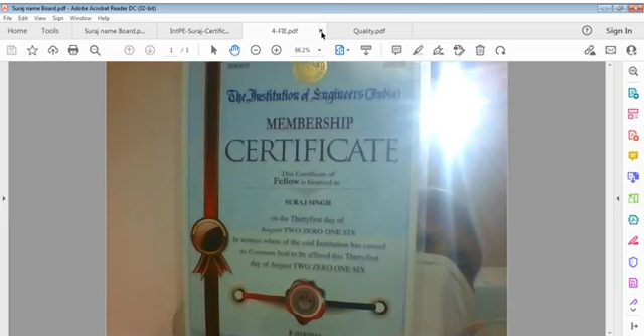And this is your quality file as usual. So I'll take care of this and close this certificate of Chartered Engineer India, and close the certificate of fellow membership, and open another file, and that is the concrete file, which is concrete from Qatar. That file is here, you can see that file. It's an important file of specifications, and you know the meaning of specification in engineering and in works.

Specifications is chapter 5, or you can say section 5, of QCS 2014, and QCS stands for Qatar Construction Specifications. This is a very important chapter, very important file, very important section, because concrete is very important all over the world.

And this is my identification indicatively. This is name and title, first title, then second title - that is Chartered Engineer as first one, and International Professional Engineer second one, Antarashtriya Professional Abhiyanta and Chartered Abhiyanta, Bharat. Of course my professional field is civil engineering, and my email ID is suraj_engineer@yahoo.co.uk. You can note it down if you wish.

And of course I belong to Bharat, India, citizen of Bharat, India, and I am resident in NCR, Delhi, that is Faridabad, near Delhi. And of course you can write to me if you wish on this email ID. If I find your question is relevant to my profession, or I am able to respond to that, I shall be glad to respond, provided the question is right, the question is clear.

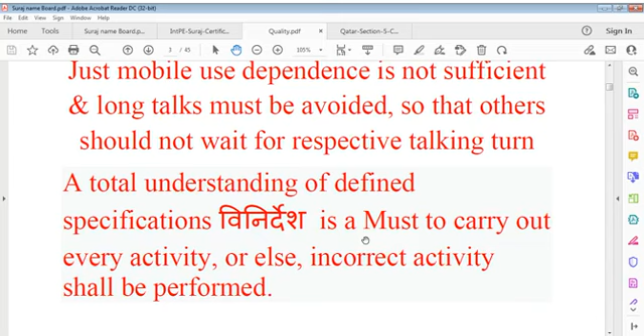Total understanding is defined in the specifications. Vinirdesh, we can say, it's like kind of technical direction. It's a kind of analytical direction. It's a kind of concrete direction that is required. And we must respect that. And if we cannot do that, this means we waste our time.

We say that it is responsibility of designers, it is responsibility of design specifying engineer to include demanded technical activity. What is that? Quality, safety, health and environment, value of ergonomics, understanding of contracts and products. These items that I have put in are very prominent and preliminary.

Quality is very important. It doesn't apply only on testing. It applies even in every approach. For example, I'm talking, I'm speaking. It should be quality speech. And quality means it should not be here and there unduly. It should speak to point, it should link to points, and then it should result in something that others can understand why I spoke for half an hour or 5 minutes, or why I spoke for 3 hours.

Was it required? If I can explain something in 5 minutes, why should I take 1 hour? For gossipism? No. Quality means whatever you do, it should be merit. It should be on merit.

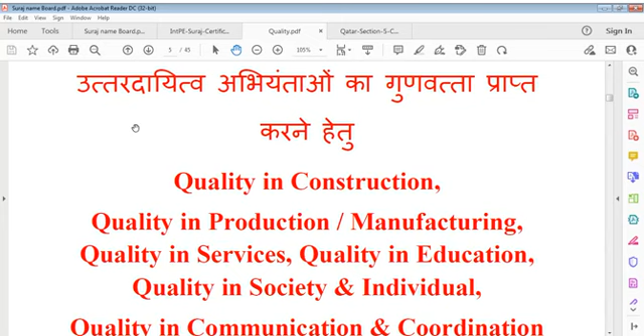Now we have to deal with in our life with construction, production, manufacturing, services, education, society, and individual. And my focus is on individual, because it is individual that is more important in procedure, in work.

And it is individual who handles communication and coordination, construction. It is individual who handles manufacturing and who delivers services. Therefore, if individual is controlled, if individual is streamlined, if individual is well profiled, I can say engineering can move in the right direction.

This impact of engineering, and on engineering, and by engineering itself, is throughout the world. It's not only in our country. I have seen many countries are very good in engineering, but nowadays I think there is deterioration everywhere because of many reasons. First of all, use of computer - excessive use of computer does not mean good engineering.

Because one who uses computer starts depending on computer and starts avoiding excessive use of mind, which is required. Excessive use of mind - only one point is positive in life which is considered negative otherwise. They say excess of everything is bad. That's okay, excess of everything is bad, but excess use of mind is always good.

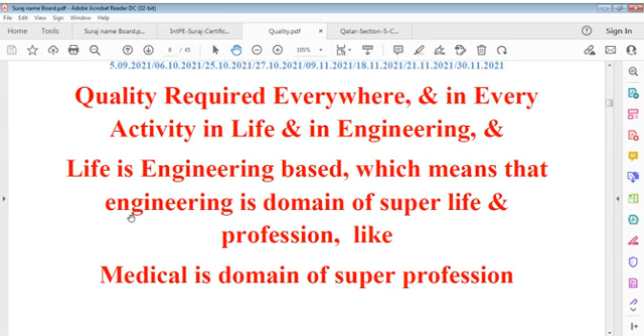It is engineering that tells us what to do, how to do, what's the way out, and that becomes a one-time formula. How many times we get success, it becomes a reference for the future. We use past references and we plan for future, particularly in profession. Profession means we have to study in depth.

That is profession, we cannot leave it to circumstances. We cannot leave it to 'okay, we have done it, that's fine, don't think, stop thinking on this.' That never works. Just like our body is dependent on respiration, on breathing, the same way life is dependent on use of mind.

And use of mind is something that cannot be measured. You cannot measure use of mind because mind is such a powerful tool. I just try to give you some information every day regarding this file, and this file says safety first, and I say quality must. Safety is first, that's okay, it should be respected, and we can say no one has got any right to give undue pain to others.

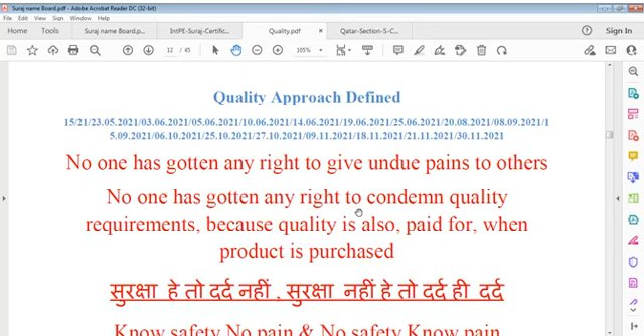No one has got any right to condemn quality requirements, because quality is also paid for when a product is purchased. But here I use my mind - it's also a product, but it's not paid for. I can use this product excessively, nobody sends any bill. Same way I can use nature excessively and nobody would send any money bill. It's a very important point.

We say if you know safety very well, if you apply safety, you won't feel any pain. But if you do not apply safety, you do not understand it very well, you do not respect it, and certainly you shall encounter pain and it will be out of your control. You may not be able to digest it.

Same way we can say you have to understand quality, you have to know quality if you want to be happy in work. You don't want to see any adverse results - adverse, you can say a chain reaction. There should be no pain if you understand it, if you use it. And also if you don't understand this, don't use it. If you ignore quality, certainly you shall have to see pain, and it shall ignore you, everything.

And we say it is necessary everywhere. Ultimately I can say that quality has to be complied with defined, specified, stated requirements, because quality parameters, quality criteria is always defined or it is understood - what are standards. Or you can say it has to be specified everywhere, or at least on work direction it has to be specified.

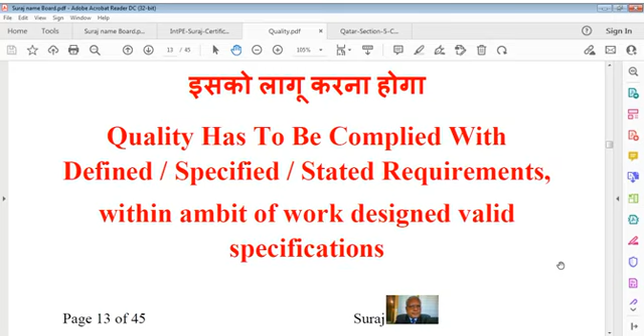So you can say plus and minus both are there. If you say somebody walks on head, nobody will accept it. But walking on head is very important as far as thinking is concerned. So I always give more value to thinking, the activity of thinking, because thinking is my power everywhere.

If I have to help people, I have to think, and have to think in a way of how to make people better, how to make products better, how to achieve quality, not only in products but also in my own approach, in dealing with people, in dealing with the world, and how to understand quality. It's really a very important subject, a very important word, much more than a subject. I don't want to bore you, but it's required.

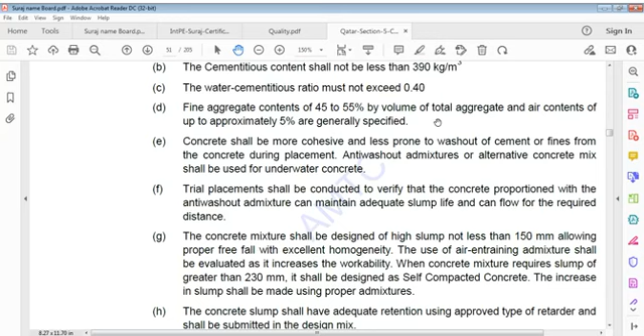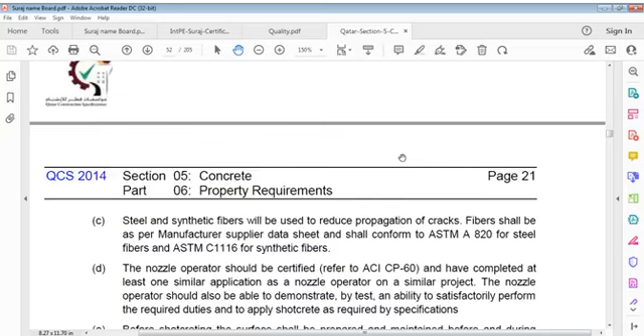I move on to some other point. I was talking about concrete yesterday. Concrete is something that cannot be taken for granted, because concrete is a very specific item. In a way, concrete is something that comes in contact and use with everybody. It's used by everyone, and it's very important. We can say we use concrete every day in our life. We cannot move without it.

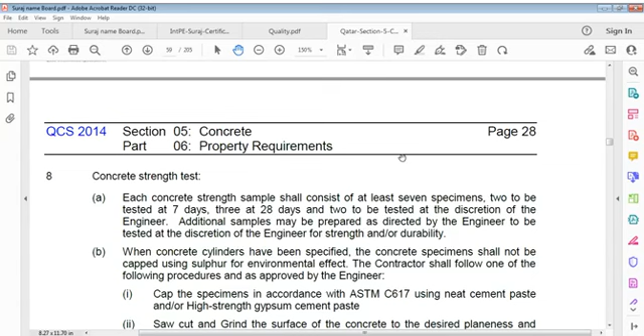Maybe sometimes we do not notice it, but we use it everywhere, in all countries, in all states, concrete is used and we should respect it. Bricks are used, we use blocks, hollow blocks and solid blocks, and those blocks are made of concrete of different classes, or different sizes.

So that is concrete. Bricks, of course, are not concrete, but that is soil, which is very important. Bricks are produced by clay. Clay means soil, and concrete comes from solidified soil, you can say solidified material, which is called rock.

Concrete aggregate means rock, stone. Concrete comes from there itself. Concrete is a combination of stone, or you can say sand, as well as water, cement, and cement you can say limestone, silica, and many chemicals. So if you go into depth of that, ultimately we find nature exists there. Without that, it's not possible to do anything.

There is nothing in this world which is not related to nature. Every item we use, every material we use, even a drop of water we use, comes from nature. Nothing comes from us. We only use available raw products and raw materials, refining them to a particular state, and concrete is one such state.

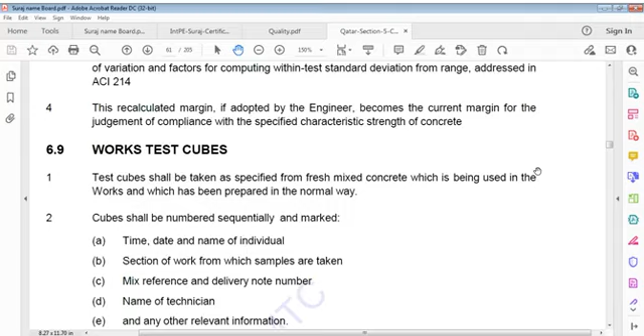That's why it's important to understand that engineering is based on raw materials, and to understand more and more is how one becomes an engineer, a technocrat.

Looking at these points here, I think we talked about some of this but missed that part in recording. That's why I want to go back and see where we stopped talking or what I did. I don't exactly remember, but we were talking about quality control charts.

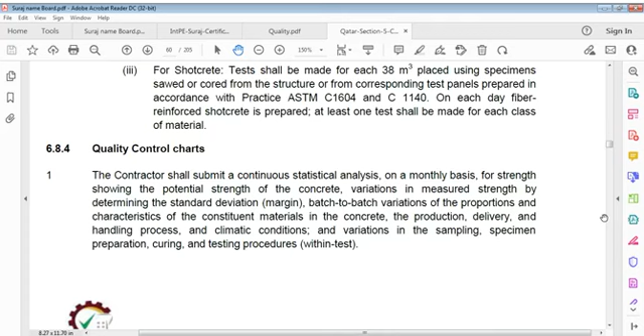We had gone to fiber concrete mixing, which we studied, and these were hardened tests for fiber reinforced concrete. Then quality control charts refer to batch mixing, that is the frequency of tests on hardened fiber reinforced concrete batch mixing, such as for fibers and shotcrete. We covered that, so I won't waste time on it again.

You can just remember fiber reinforced concrete, and before that it was concrete strength testing, where cubes had to be tested at 7 days and 28 days. We studied that as well.

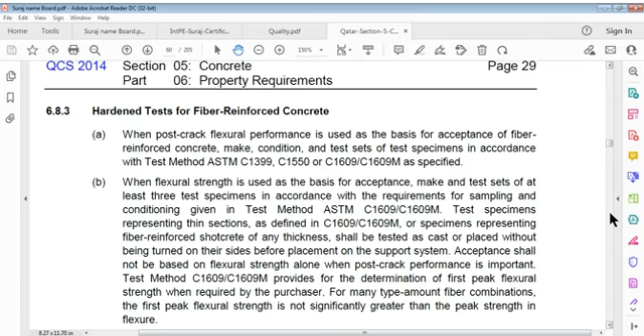Now, hardened tests for fiber reinforced concrete: when post-crack flexural performance is used as a basis for acceptance of fiber reinforced concrete, we make conditions and test sets for testing. We covered this, and then we did batch mixing.

So now let's discuss quality control charts. Let's start from here, because we need a starting line. This can be repeated in the future too, no issue, since I can't take all this time just to repeat it.

Here the contractor term starts again. The contractor shall submit a continuous statistical analysis on a monthly basis for strength, showing potential strength of concrete and variations in measured strength by determining standard deviation or margin, batch to batch variation of proportions and characteristics of constituent materials in concrete, production, delivery and handling process, and climatic conditions and variation in sampling specimens.

The contractor shall provide in its analysis the mean strength, calculated standard deviation, normal distribution of concrete strength, and frequency histograms. The contractor shall draw upper and lower lines: a warning line, target mean strength plus or minus 2 standard deviations, and a control line, target mean strength plus or minus 3 times the standard deviation.

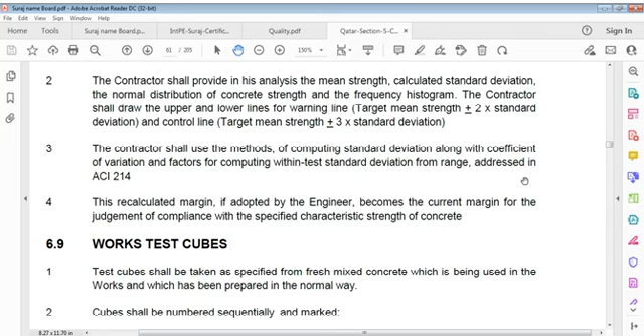Now, the recalculated margin, if adopted by the engineer, becomes the current margin for judgment of compliance with the specified characteristic strength of concrete. Now let's talk about work test cubes.

We always know that cubes are taken as site samples while pouring concrete. Test cubes shall be taken as specified from fresh mixed concrete which is included in the works, and which has been prepared in a normal way.

What do these cubes inform? Cubes shall be numbered to give some reference: the time, date and name of individual, section of work from which the sample is taken, mix reference, delivery note number, name of technician, and whatever relevant information is limited to. We can record this by giving some number to the cube, since writing everything on the cube itself is not possible.

The date can be written in a different way, or recorded somewhere if it cannot be written directly. Not everything can go on the cube, but we should keep a record of all this information.

It's better to write some number on the cube and record elsewhere all the other information: time, date, individual name, section of work, sample reference, delivery note number, name of technician, and any other relevant information. We record this by giving the cube a number, and these numbers should continue in sequence.

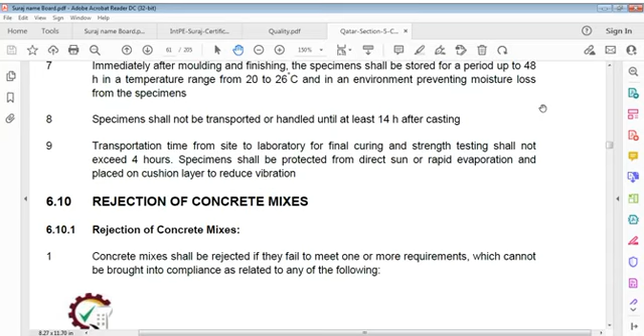Specimens shall not be transported or handled until at least 14 hours after casting. Transportation time from site to laboratory for final curing and strength testing shall not exceed 4 hours, meaning it should not be a long distance travel.

Specimens shall be protected from direct sunlight or rapid evaporation, and placed on a cushion layer to reduce vibration.

Rejection of concrete mixes. What is here? We are going to talk about how concrete mixes shall be rejected if they fail to meet one or more requirements which cannot be brought into compliance as required.

We can say, when an improper class or grade of concrete than what is required is delivered, it is rejected. If I require 30 and I get only 25, it is rejected. It's not the class I require - though it is not rejected otherwise, but for use on this work, it is rejected.

If slump or temperature is not within the specified limits, it is rejected. If it exceeds slump considerably, or exceeds temperature considerably, we cannot accept this.

And aggregate size - if the maximum aggregate size is 20 mm, it cannot be used in a way that 40 mm is used. So 40 mm or other sizes in the range between 20 and 40, or 25 to 40, we can't accept that.

If the maximum water cement ratio is exceeded - let's say it's 0.3 or 0.35 and it's given as 0.5 - there's no way I can accept this. No way, no question.

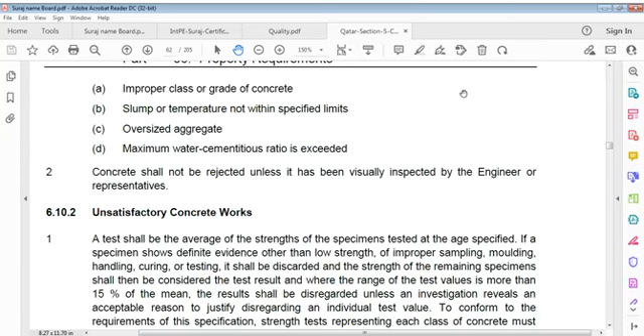There are more points. Concrete shall not be rejected unless it has been visually inspected by the engineer or representatives - of course they have to view it. Without that, we cannot reject it. And of course, it's based on experience and practice and people's understanding and conduct, how they want to work.

Now, unsatisfactory concrete work is a very important point. Unsatisfactory concrete work means if the work is unsatisfactory, there's no way we use it. Yes, that's right. What to do with that?

We have to test it. How do we do that test? And that's the important point. A test shall be the average of strengths of specimens tested at the age specified.

If a specimen shows definite evidence, other than low strength, of improper sampling, improper molding, improper handling, improper curing or testing, it shall be discarded, and the strength of the remaining specimens shall be considered for our calculation, or test results.

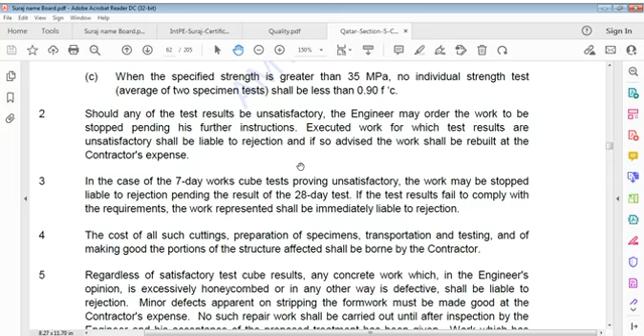Investigation of course shall be done, but probability is that work shall be rebuilt, which is a huge loss - time loss, cost loss, material loss, and of course respect loss. In case of 7-day work cube test proving

unsatisfactory, work may be stopped, may be stopped and liable to rejection pending results of 28 days test. If test results fail to comply with requirements, work represented shall be immediately liable to rejection.

It's a very important point - you have to wait till 28 days. We have to wait from the 8th day to the 28th day to make sure that new results justify, new results succeed. But if it fails, then no way, work has to be done again.

There may be other problems we can see from case to case, but it is a plain specification condition that if your concrete fails on the 7th day test, it may still pass on 28 days, and the 28 days test is considered conclusive, decisive.

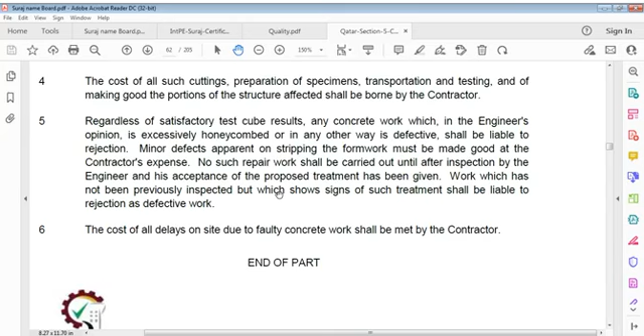Work which has not been previously inspected but which shows signs of such treatment shall be liable to be rejected as defective work, and the cost of all delays on site due to faulty concrete work shall be met or borne by contractor.

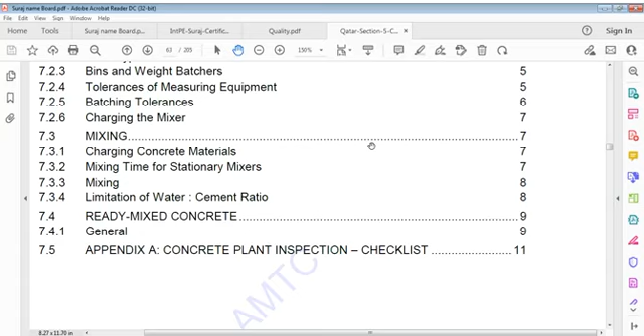Now we are going to talk about concrete plants. Concrete plants, or batching plants, generally have scope references. In batching general: plant type, bins and weight batchers, tolerances of measuring equipment, batching tolerances, charging, mixer, mixing, charging concrete materials, mixing time for stationary mixers, limitation of water cement ratio, ready mix concrete general, and appendix A on concrete plant inspection.

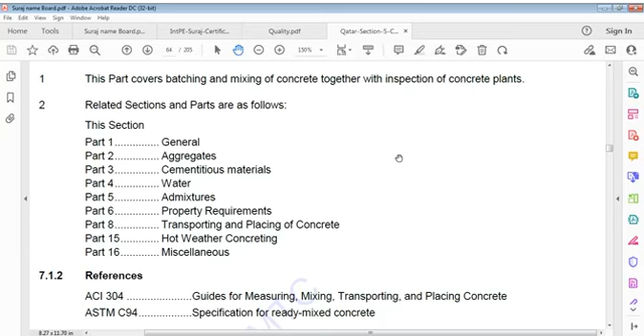This part covers batching and mixing of concrete together with inspection of concrete plants. Related sections in this part are: general, aggregates, cementitious materials, water admixtures, property requirements, transporting and placing of concrete, hot weather concreting, and miscellaneous.

We have references here: guides for measuring, mixing, transporting and placing concrete; specification for ready mix concrete. I am not reading the reference numbers, you can see them yourself. Testing concrete, concrete specification complementary, and testing of hardened concrete, testing hardened concrete part 1: the shape, dimensions and other requirements for specimen and molds.

Testing hardened concrete part 2: making and curing specimen for strength tests. Testing hardened concrete part 3: compressive strength of test specimen. Testing hardened concrete specification for testing machines, compressive strength.

Part 4: compressive strength specification of testing machines. Testing hardened concrete part 5: flexural strength of test specimen. Testing hardened concrete part 6: tensile splitting strength of test specimen. Testing hardened concrete part 7: density of hardened concrete.

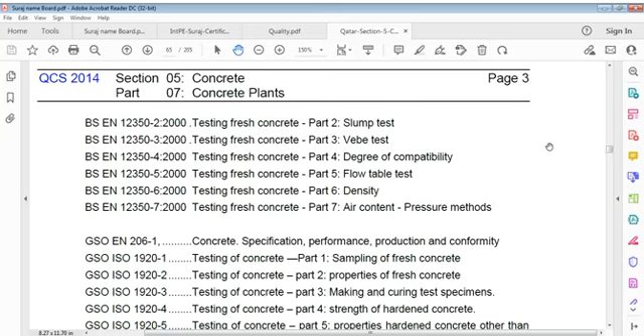Testing hardened concrete part 8: depth of penetration of water under pressure. Testing fresh concrete part 1: sampling. Testing fresh concrete part 2: slump test. Testing fresh concrete part 3: Vebe test. Testing fresh concrete part 4: degree of compactability. Testing fresh concrete part 5: flow table test. Testing fresh concrete part 6: density.

Testing fresh concrete part 7: air content, pressure methods. Concrete specification performance, production and conformity. Testing of concrete part 1: sampling of fresh concrete. Testing of concrete part 2: properties of fresh concrete. Testing of concrete part 3: making and curing test specimen.

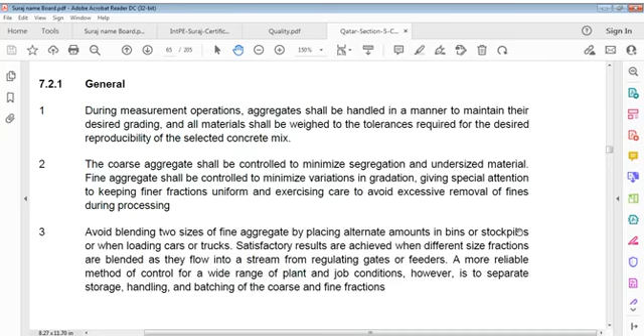Testing of concrete part 4: strength of hardened concrete. Part 5: properties of hardened concrete other than strength. Part 6: sampling, preparing and testing of concrete core. Part 7: non-destructive test on hardened concrete. Part 8: determination of dry shrinkage of concrete for samples prepared in field or laboratory. Part 9: determination of creep of concrete cylinders in compression. Part 10: determination of static modulus of elasticity in compression.

Now, batching. During measurement operations, aggregates shall be handled in a manner to maintain their desired grading, and all materials weighed to tolerances required for desired reproducibility of selected concrete mix.

Coarse aggregate shall be controlled to minimize segregation and undersized material. Fine aggregate shall be controlled to minimize variations in grading, giving special attention to keeping finer fractions uniform and exercising care to avoid excessive removal of fines during processing.

Avoid blending two sizes of fine aggregate by placing alternate amounts in bins or stockpiles or when loading cars or trucks. Satisfactory results are achieved when different size fractions are blended as they flow into a stream from regulating gates or feeders. A more reliable method of control for a wider range of plant and job conditions, however, is to separate storage, handling and batching of coarse and fine fractions.

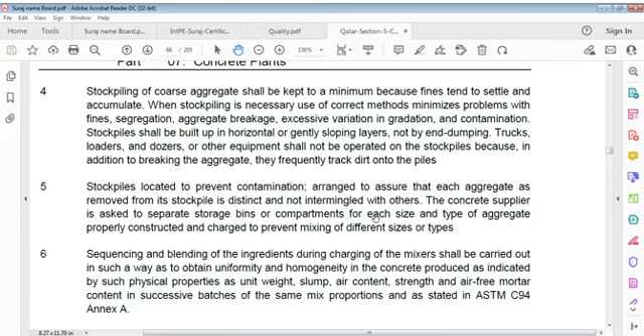Stockpiles located to prevent contamination, arranged to assure that each aggregate as removed from its stockpile is distinct and not intermingled with others. The concrete supplier is asked to have separate storage bins and compartments for each size and type of aggregate, properly constructed and charged to prevent mixing of different sizes or types.

Sequence and blending of ingredients. Sequencing and blending ingredients during charging of the mixer shall be carried out in such a way as to obtain uniformity and homogeneity in concrete produced, as indicated by such physical properties as unit weight, slump, air content, strength and air-free mortar content in successive batches of the same mix proportions, as stated in ASTM C94 Annex A.

Mix recipes for mixes to be produced shall be readily available to mixer operators. Only authorized personnel shall be allowed to make changes to mix design. All cement bags shall be stored in weather-tight, properly ventilated structures to prevent absorption of moisture.

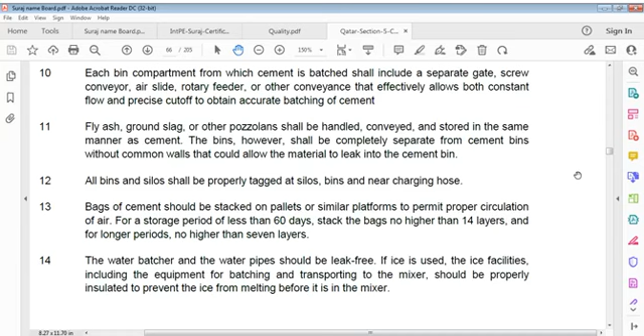Water batchers and water pipes should be leak free. If ice is used, ice facilities, including equipment for batching and transporting to the mixer, should be properly insulated.

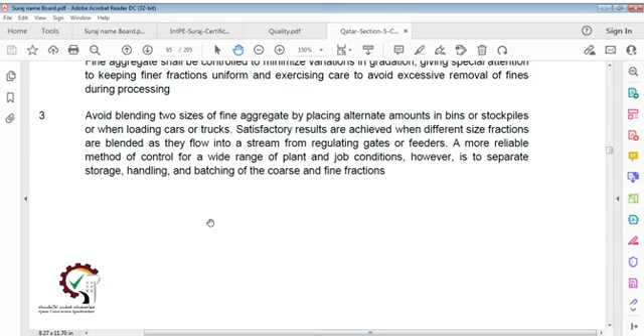Avoid blending two sizes of fine aggregates by placing alternate amounts in bins or stockpiles or when loading cars or trucks. Satisfactory results are achieved when different size fractions are blended as they flow into a stream from regulating gates or feeders. A more reliable method of control for a wide range of plant and job conditions, however, is to separate storage, handling and batching of coarse aggregate and fine fractions.

Stockpiling of coarse aggregate shall be kept to a minimum because fines tend to settle and accumulate. When stockpiling is necessary, use of correct methods minimizes problems with fines, segregation, aggregate breakage, excessive variation in gradation, and contamination.

Stockpiles shall be built up in horizontal or gently sloping layers, not by end dumping. Trucks, loaders and dozers or other equipment shall not be operated on stockpiles because, in addition to breaking aggregate, they frequently track dirt onto the piles.

Stockpiles shall be located to prevent contamination, arranged to assure that each aggregate as removed from its stockpile is distinct and not intermingled with others. The concrete supplier is asked to separate storage bins or compartments for each size and type of aggregate, properly constructed and charged to prevent mixing of different sizes or types.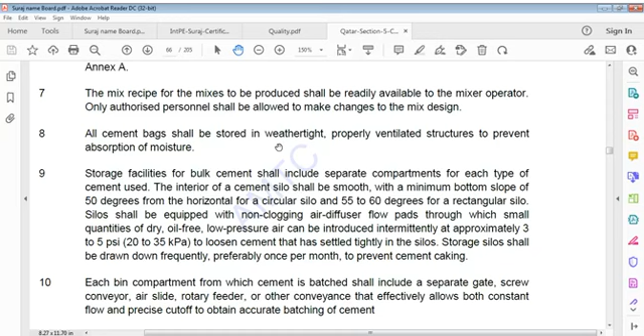Cement bags shall be stored in watertight or weathertight, properly ventilated structures to prevent the absorption of moisture. Storage facilities for bulk cement shall include separate compartments for each type of cement used.

The interior of cement silos shall be smooth with a minimum bottom slope of 50 degrees from horizontal for a circular silo and 55 to 60 degrees for a rectangular silo. Silos shall be equipped with non-clogging air diffusers.

Flow pads through which small quantities of free, dry, oil-free, low pressure air can be introduced intermittently at approximately 3 to 5 psi, 20 to 35 kPa, to loosen cement that has settled tightly in silos.

Storage silos shall be drawn down frequently, preferably once per month, to prevent cement caking.

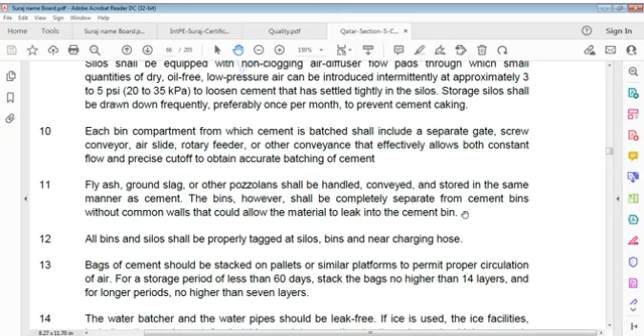Each bin compartment from which cement is batched shall include a separate gate, screw conveyor, air slide, rotary feeder, or other conveyance that effectively allows both constant flow and precise cutoff to obtain accurate batching of cement. Same for fly ash.

Ground slag, fly ash, GGBS or other pozzolans shall be handled, conveyed and stored in the same manner as cement. Bins, however, shall be completely separate from cement bins without common walls that could allow material to leak into cement bins.

All bins and silos shall be properly tagged at silos, bins and near the charging hose. Bags of cement should be stacked on pallets or similar platforms to permit proper circulation of air for a storage period of less than 60 days.

All bins and silos shall be properly tagged at silos, bins and near the charging hose. Bags of cement should be stacked on pallets or similar platforms to permit proper circulation of air for a storage period of less than 60 days. Stack bags no higher than 14 layers, and for no longer period.

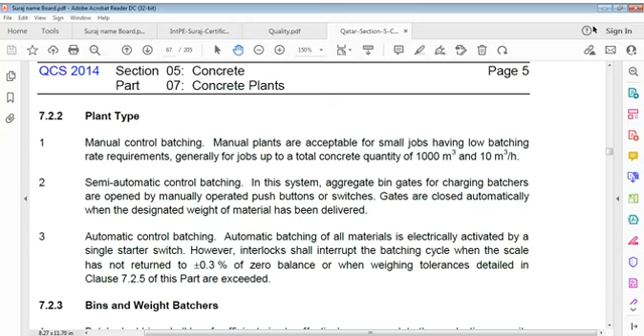Automatic control batching. Automatic batching of all materials is electrically activated by a single starter switch. However, interlocks shall interrupt the batching cycle when the scale has not returned to plus minus 0.3% of zero balance, or when weighing tolerances detailed in Clause 7.2.5 of this part are exceeded. So, manual batching, semi-automatic control batching, and automatic control batching.

Bins and weigh batches, weight batches and batch plant. Batching plant bins shall be of sufficient size to effectively accommodate production capacity. It's a very important point here, we have to see that.

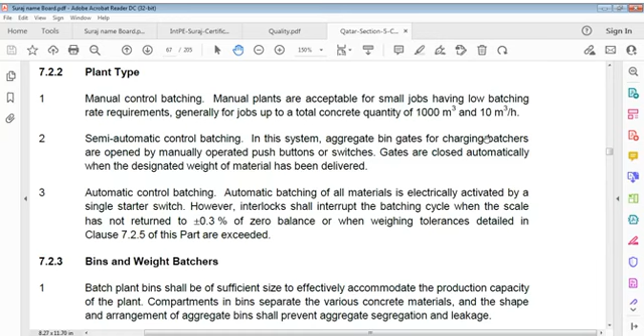Semi-automatic control batching: in this system, aggregate bin gates for charging batchers are opened by manually operating push buttons or switches. Gates are closed automatically when designated weight of material has been delivered. Automatic control batching of all materials is electrically activated by a single starter switch. However, interlocks shall interrupt the batching cycle when scale has not returned to plus minus 0.3% of zero balance, or when weighing tolerance is as detailed in the clause of this part.

Bins and weigh batchers: batch plant bins shall be sufficient size to effectively accommodate production capacity of plant. Compartments in bin separate various concrete materials, and shape and arrangement of aggregate bin shall prevent aggregate segregation and leakage. Weight batchers shall be charged with easy operating clamshell or undercut radial type bin gates.

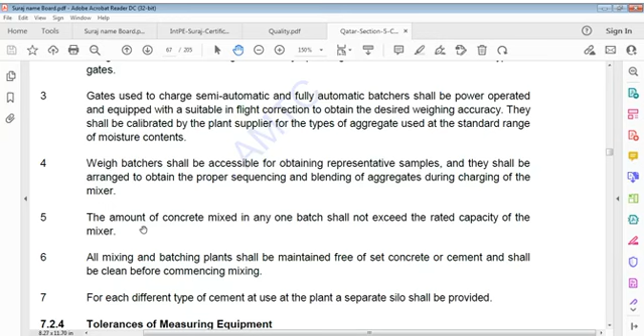Gates used to charge semi-automatic and fully automatic batchers shall be power operated and equipped with a suitable in-flight correction to obtain desired weighing accuracy. Shall be calibrated by plant supplier for type of aggregate used at standard range of moisture contents. Weigh batcher shall be accessible for obtaining representative samples and shall be arranged to obtain proper sequencing and blending of aggregate during charging of mixer. Amount of concrete mixed in one batch shall not exceed rated capacity of mixer. All mixing and batching plants shall be maintained free of set concrete or cement and shall be cleaned before commencing mixing. For each different type of cement in use at plant, a separate silo shall be provided.

Tolerances of measuring equipment: scales for weighing concrete ingredients shall be accurate when in use within plus or minus 3%, and plus or minus 1.5% for additives. Concrete ingredients shall be accurate when in use with plus or minus 3% scale value, and plus or minus 1.5% for additives. Standard test weights shall be available to permit checking of scale accuracy.

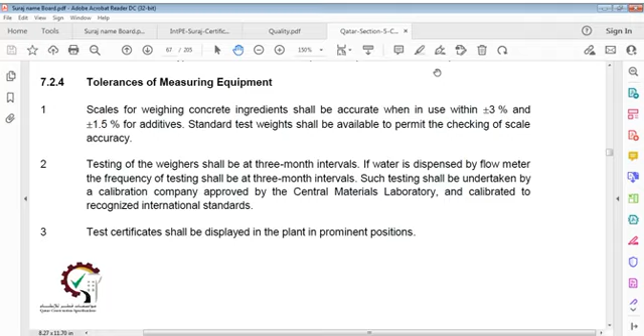Testing of weighers shall be at 3 month intervals. If water is dispensed by flow meter, frequency of testing shall be at 3 month intervals. If such testing is undertaken by a calibration company, it shall be approved by the client, approved by Central Materials Laboratory and calibrated to recognized international standards. Test certificate shall be displayed in plant in a prominent position.

Batching tolerances: operation of batching equipment. Operations of batching equipment shall be such that concrete ingredients are consistently measured within the following tolerances. Plant shall have ability to flag values that are outside these limits. Operators shall make manual adjustments to batching, and final weights shall be within the given limits stated.

Batching tolerances: operation of batching equipment shall be such that concrete ingredients are consistently measured within following tolerances. Plant shall have ability to flag values that are outside these limits. Operators shall make manual adjustments to batching, and final weights within given limits as per the table, with any adjustment displayed on batch weight printouts.

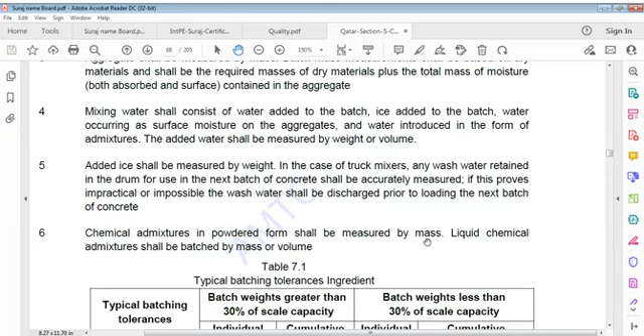Chemical admixtures in powdered form shall be measured by mass. So chemical admixtures in powder form shall be measured by mass. Liquid chemical admixtures shall be batched by mass or volume.

This is a table of typical batching tolerances for ingredients, when batch weighs greater than 30% of scale capacity, for individual batch and cumulative batch; then when batch weighs less than 30% of scale capacity, for individual batch and cumulative batch.

How many items are there? You can see one is cement and other cementitious materials, then water by volume or weight percentage, aggregate percentage, admixtures by volume or weight percentage. These are the only ones. So we can say in this case, cement and other cementitious materials plus or minus 1% of required mass, or plus or minus 0.3% of scale capacity, whichever is greater.

This batch weighs greater than this: plus 1% of required mass for cement and other cementitious materials, minus 1% of required mass, or plus or minus 0.3% of scale capacity. This is for individual batch and cumulative batch, also when batch weighs less than 30% of scale capacity.

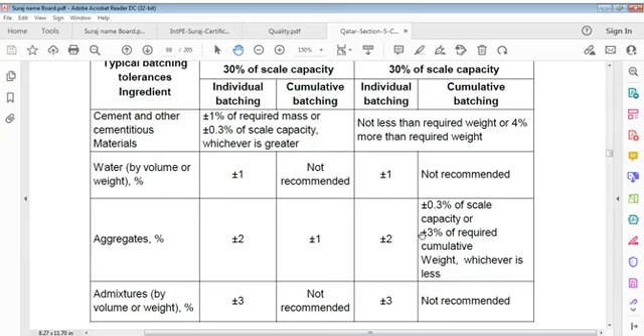Cement supplied in bags shall be placed directly from bag into intake of mixing plant, and each batch must contain one or more complete bags of cement. No mixer having a rated capacity of less than a one-bag batch shall be used.

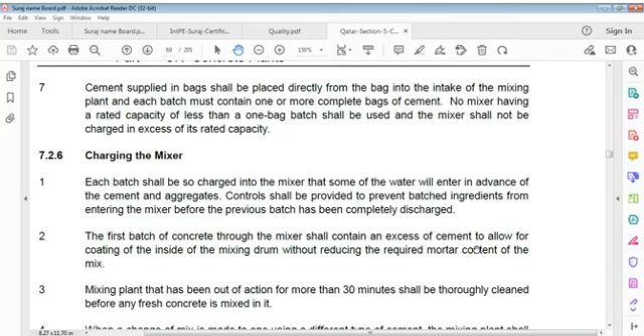Now, cement supplied in bags shall be placed directly from bag into intake of mixing plant. Each batch must contain one or more complete bags of cement. No mixer having a rated capacity of less than a one-bag batch shall be used, and mixer shall not be charged in excess of its rated capacity.

Charging mixer: each batch shall be so charged into mixer that some water enters in advance of cement and aggregate.

Controls shall be provided to prevent batched ingredients from entering mixer before previous batch has been completely discharged.

First batch of concrete through mixer shall contain an excess of cement to allow for coating of inside of mixing drum without reducing required mortar content.

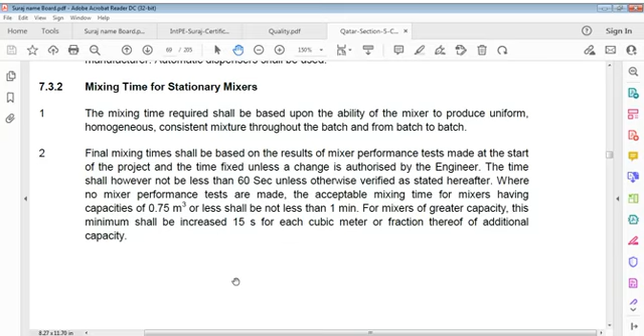Where no mixer performance tests are made, acceptable mixing time for mixers having a capacity of 0.75 cubic meters or less shall be not less than 1 minute. For mixers of greater capacity, the minimum shall be increased 15 seconds for each cubic meter or fraction thereof of additional capacity.

Where mixer performance tests have been made on a given concrete mixture in accordance with the testing program, and mixers have been charged to their rated capacity, acceptable mixing time is permitted to be reduced for those particular circumstances to a point at which satisfactory mixing, as defined in ASTM C94 Annex and NRMCA certification for central mixing plants, shall have been accomplished. When mixing time is so reduced, mixing time shall not exceed this reduced time by more than 60 seconds for air-entrained concrete.

Mixing time shall be measured from the time all ingredients are in the mixer.

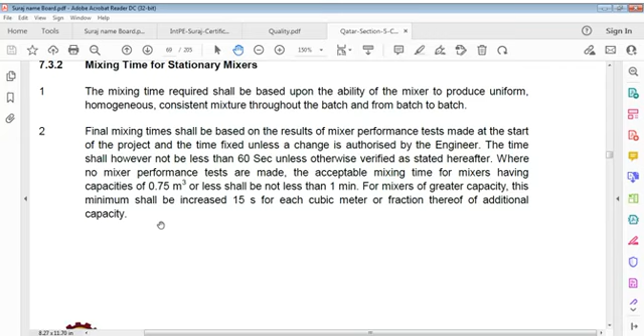When no mixer performance tests are made, acceptable mixing time for mixers having a capacity of 0.75 cubic meters or less shall be not less than 1 minute. For mixers of greater capacity, the minimum shall be increased 15 seconds for each cubic meter or fraction thereof of additional capacity.

Where mixer performance tests have been made on a given concrete mixture in accordance with the testing program per ASTM C94 Annex A, and NRMCA (National Ready Mixed Concrete Association) certification, and mixers have been charged to their rated capacity, acceptable mixing time is permitted to be reduced for those particular circumstances to a point at which satisfactory mixing, as defined in ASTM C94 and NRMCA certification for central mixing plants, shall have been accomplished. When mixing time is so reduced, the maximum time per mixing...

It's a very important point that when mixing time is so reduced, the maximum time of mixing shall not exceed this reduced time by more than 60 seconds for air-entrained concrete. Mixing time shall be measured from the time all ingredients are in the mixer.

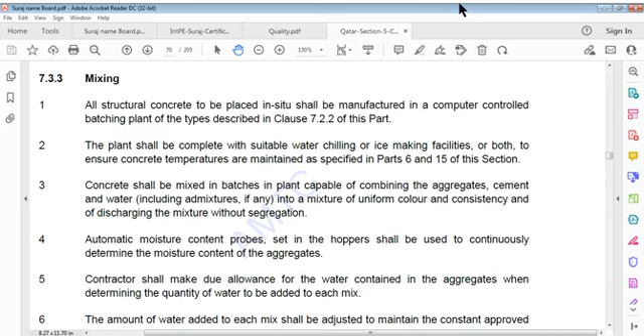All structural concrete to be placed in situ shall be manufactured in a computer controlled batching plant of type described previously. Plant shall be complete with suitable water chilling or ice making facilities, or both, to ensure concrete temperatures are maintained as specified. Concrete shall be mixed in batches in plant capable of combining aggregates, cement and water, including admixtures, into a mixture of uniform color and consistency, discharging the mixture without segregation.

Automatic moisture content probes set in hoppers shall be used to continuously determine moisture content of aggregate. Contractor shall make due allowances for water contained in aggregates when determining quantities of water to be added to each mix.

Plant shall be complete with suitable water chilling or ice making facility, or both, to ensure concrete temperatures are maintained. Concrete shall be mixed in batches in plant capable of combining aggregate, cement and water, including admixtures, into a mixture of uniform color and consistency and of discharging.

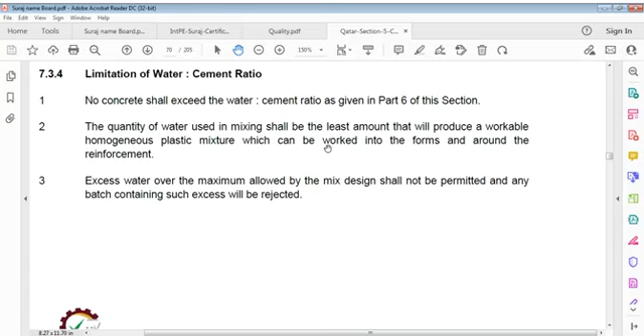Now, no concrete shall exceed the water cement ratio. Quantity of water used in mixing shall be the least amount that produces a workable homogeneous plastic mixture which can be worked into forms and around reinforcement. Excess water over the maximum allowed by mix design shall not be permitted, and whatever batch containing such excess shall be rejected.

Just a minute, please. Just a minute. I'm trying to find some document. Just a minute, just a minute. Yes, it's just where it's gone. I don't know where it's gone. Anyway, let me see how this works.

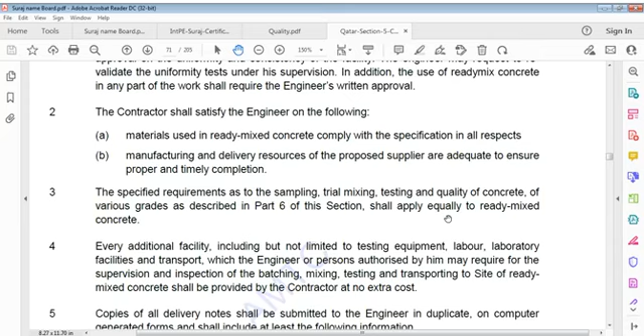Contractor shall satisfy engineer on the following issues: materials used in ready-mix concrete comply with specifications in all respects; manufacturing and delivery resources of proposed supplier are adequate to ensure proper and timely completion.

Specified requirements as to sampling, trial mixing, testing and quality of concrete of various grades as described shall apply equally to ready-mix concrete. Every additional facility, including but not limited to testing equipment, workforce, laboratory facilities and transport, which the engineer or persons authorized by it may require for supervision and inspection of batching, mixing, testing and transporting to site of ready-mix concrete shall be provided by the contractor at no extra cost.

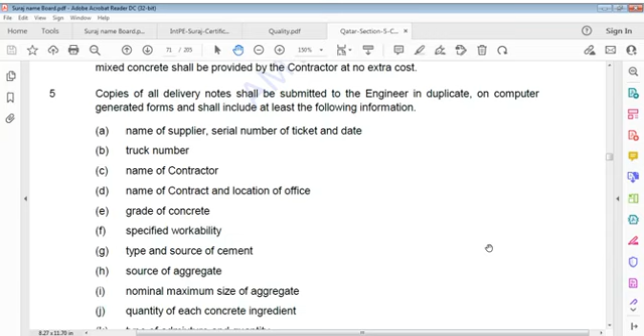Copies of all delivery notes shall be submitted to the engineer in duplicate on computer generated forms and shall include at least the following information: name of supplier, serial number of ticket and date, truck number, name of contractor, name of contract and location of office.

Grade of concrete, specified workability, type and source of cement, source of aggregate, nominal maximum size of aggregate, quantity of each concrete ingredient, type of admixture and quantity, water content, time of loading and departure from the ready mix plant, arrival and departure time of truck, and time of completion of discharge.

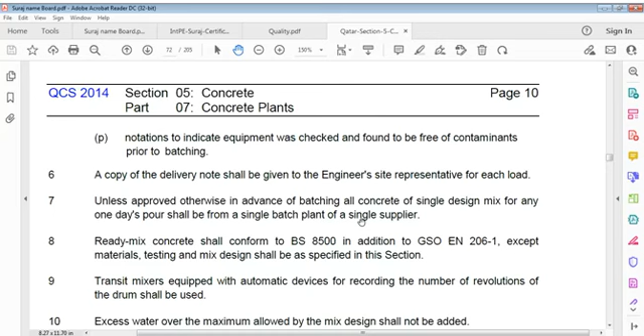Notations to indicate equipment was checked and found to be free of contaminants prior to batching. A copy of the delivery note shall be given to the engineer's representative for each load, unless approved otherwise in advance of batching.

Point to be remembered: unless approved otherwise in advance of batching, all concrete of single design mix for one day's pour shall be from a single batch plant of a single supplier.

Ready mix concrete conforms to BS 8500 in addition to GSO EN 206-1, except for materials testing and mix design as specified in this section. Transit mixers equipped with automatic devices for recording the number of revolutions of the drum shall be used.

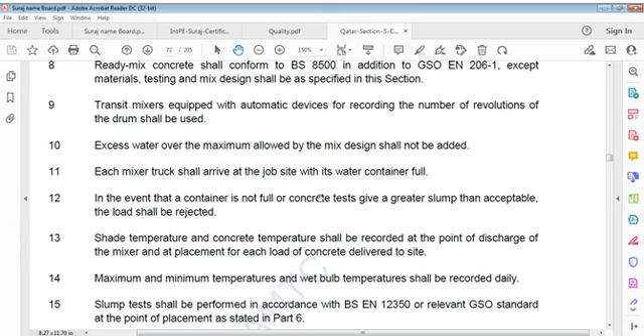Excess water over the maximum allowed by the mix design shall not be added. Each mixer truck shall arrive at the job site with its water container full. In the event that the container is not full or concrete tests give a greater slump than acceptable, the load shall be rejected.

Shade temperature and concrete temperature shall be recorded at the point of discharge of the mixer and at placement for each load of concrete delivered to site. Maximum, minimum, and wet bulb temperatures shall be recorded daily.

Slump test shall be performed in accordance with BS, or relevant SASO and GSO standards. Shade temperature and concrete temperature shall be recorded at the point of discharge of the mixer and at placement for each load of concrete delivered to site. Maximum and minimum temperatures and wet bulb temperatures shall be recorded daily. Slump test shall be performed in accordance with BS EN 12350 or the relevant GSO standard at the point of placement.

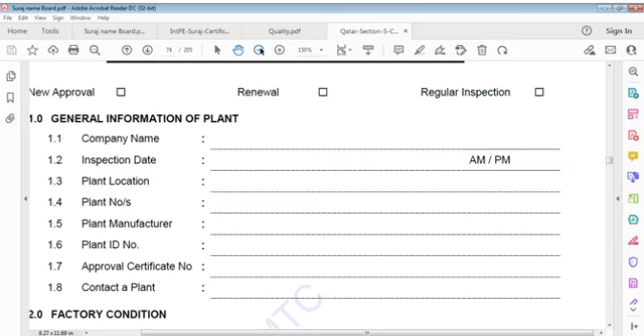No water shall be added at site. Concrete plant inspection checklist.

General information of plant. Give me a few minutes. I think it's better to go and come back, because I'll give you some pages you can read, so that you will be happy. You can read it, I'll just zoom it in so you can read this page. Meanwhile I'll be back, okay, and I'll come back to checking the issue.

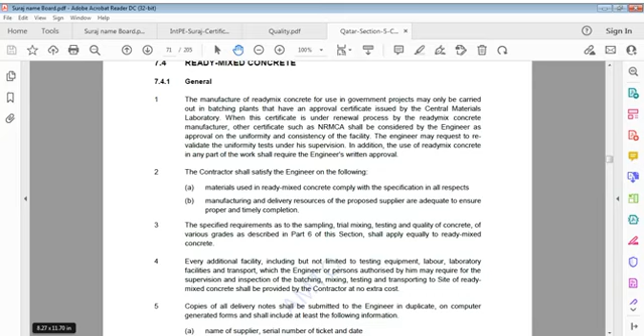So I think you've gone through this successfully. Now we'll go back to our point, as said earlier, and that's here. Now, the checklist you're going to do is the inspection checklist.

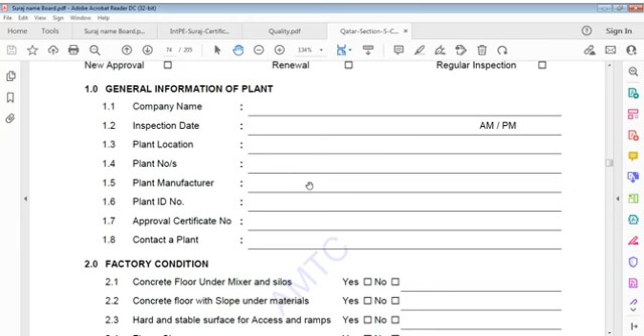Inspection checklist, the concrete plant inspection checklist, this is here. You can say general information of plant: company name, inspection date, plant location, plant numbers, plant manufacturer, plant ID number, approval certificate number, contact at plant.

Then factory condition: concrete floor under mixer and silos. What type of concrete floor is there, or does it not exist? You have to check that.

Concrete floor with slope under materials. There should be a floor below the materials, and what is the slope of that? Hard and stable surface for access and ramps.

Floors clean, cleaning plant implements, drainage system, separated place of waste material, and separated place of water tank.

Material storage and handling: cement and cementitious materials, including blended cements, fly ash, GGBS, silica fumes, etc. Silos of cement outside.

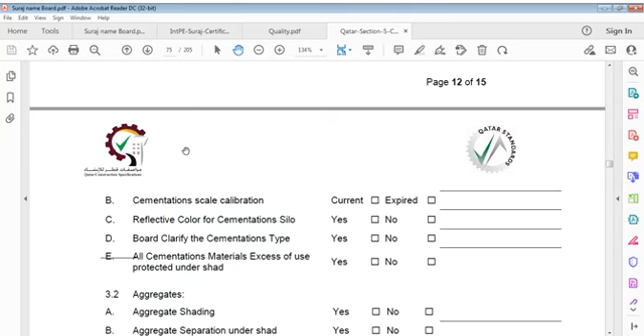Cleaning for cement silos, cement scale calibration, a reflective color for cement silo, board to clarify cement type. Silos of cementitious materials, outside cleaning for cementitious silo, cementitious scale calibration, reflective color for cementitious silo, and board to clarify cementitious type. All cementitious materials excess of use protected under shade.

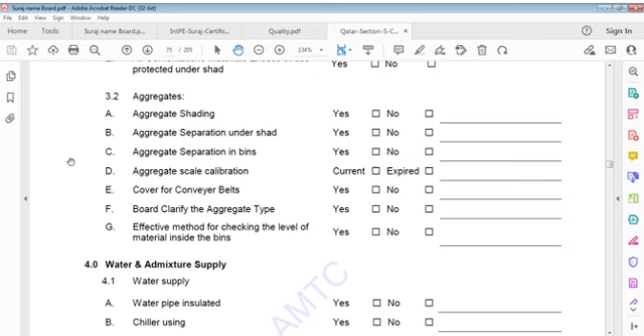Aggregate: shading, aggregate separation under shading, aggregate separation in bins, aggregate scale calibration, cover for conveyor belts, board to clarify aggregate type. Effective method to check level of material inside bins.

Water and admixture supply: water supply, water pipe insulated, chiller using ice plant or nitrogen cooling, water gauge calibration, admixture supply, additive storage silos, additive gauge calibration, board to clarify admixture type. All admixture at site of use protected under shade, agitation system for all storage.

Tanks or silos more than 5000 liters. Requirements of concrete batching plant: certificate validity, computer controlled, plant type, computer printout, calibration validity, cleaning of plant blades.

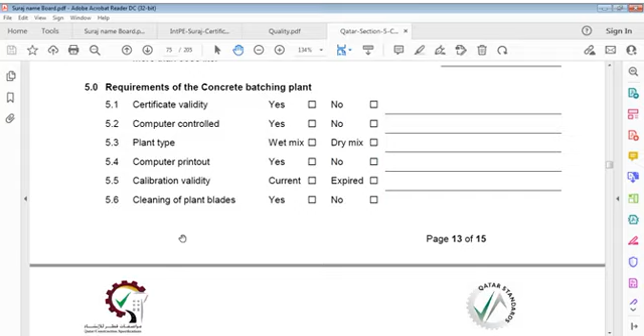Certificate validity, requirements of concrete batching plant. Certificate validity, computer controlled, plant type, computer printout, calibration validity, cleaning of plant blades.

Laboratory: records for raw materials and cube test, grading as per QCS, fines content percentage, fines quality, clay lumps and friable particles.

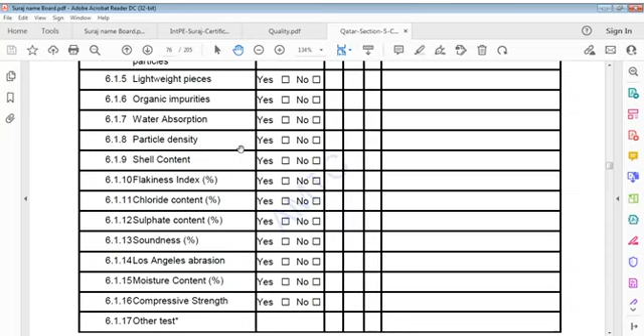Lightweight pieces, organic impurities, water absorption, particle density, shell content, flakiness index, chloride content, sulfate content, soundness, Los Angeles abrasion, moisture content, compressive strength, and other tests.

Specimen testing at inspection time: method of slump test, curing of samples, water temperature of curing tank, concrete temperature at plant, concrete slump at plant. Laboratory equipment calibration: compression testing machine, sieves, balance, thermometers.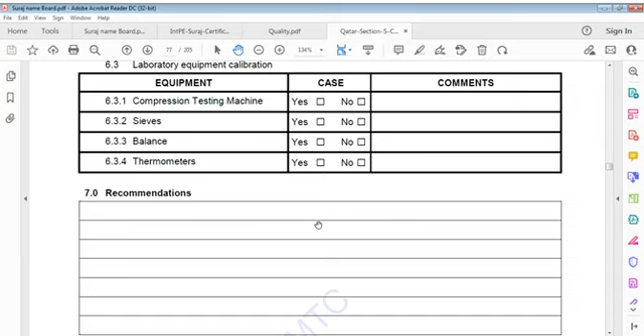Recommendations. Plant representative information: name of representative, contact number, signature, inspection by.

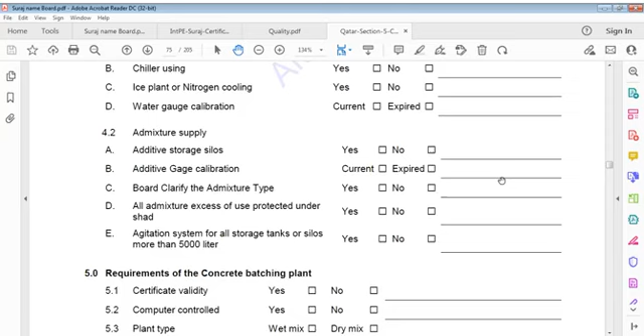Now, transportation and placing of concrete.

This information that we provide to you about this plant is very important. We cannot take it for granted because it should be known to everybody. Maybe you are a quality person, or an inspector, or doing investigation, whatever information you are doing, all this is very important, and I showed it to you because it matters. Don't take it as if it's not our job. It is the job of every concrete person, civil engineer, mechanical engineer, whoever you are.

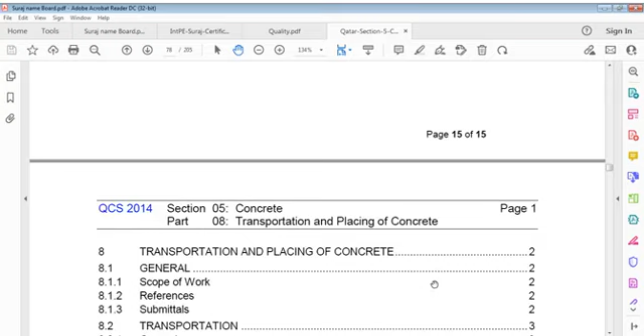General information of the plant you have to know, factory conditions you have to know, material storage and handling you have to know, water and admixture supply, and requirements of the concrete batching plant, laboratory, and maybe you are a member of a third party, then you should know all this.

You have the transportation and placing of concrete, and this side per part, and this will go through this: transportation, placing of concrete, general, scope of work, references, submittals, transportation, general, pumped concrete, records, placing concrete, general preparation, placing, compaction, continuity of concrete work. Therefore we have to discuss transportation and placing of concrete in general.

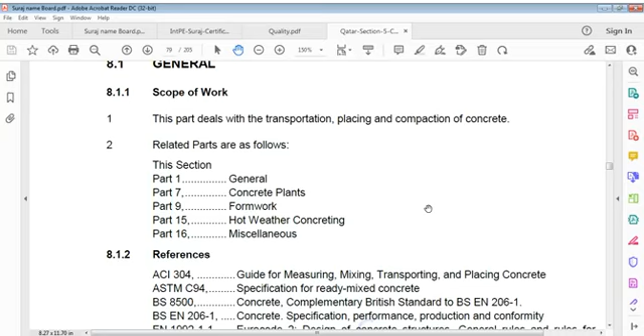This is the scope of work. This part deals with transportation, placing, and compaction of concrete: general, concrete plants, formwork, hot weather concreting, miscellaneous.

References: guide for measuring, mixing, transporting, and placing concrete; specification for ready-mix concrete; concrete complementary British standard; concrete specification, performance, production and conformity; Eurocode for design of concrete structures, general rules and rules for buildings. Submittals.

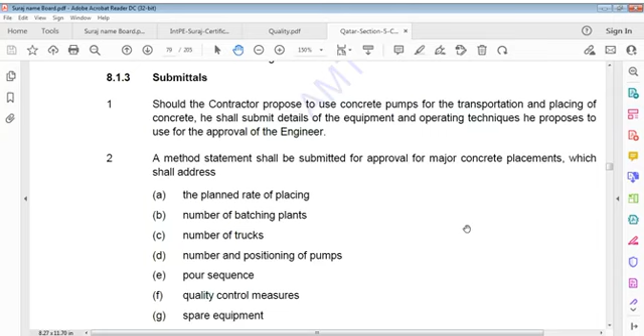Should the contractor propose to use concrete pumps for transportation and placing of concrete, they shall submit details of equipment and operating techniques proposed for approval of the engineer. A method statement shall be submitted for approval for major concrete placements, which shall address planned rate of placing, number of batching plants, number of trucks, number and positioning of pumps, pour sequence, quality control measures, spare equipment, and whatever other factors might affect placing of concrete.

I repeat, these are minimum, you can add whatever is required: planned rate of placing, number of batching plants, number of trucks, number and positioning of pumps, pour sequence, quality control measures, spare equipment, and whatever other factors might affect placing of concrete.

These are related to plants. You can add your own site factors, location factors, particular factors, timings, what time to start, which cubic meter, how many workers, all that we have given before. That includes part of the particular concrete statement that should be submitted.

Method statement should be submitted at least 3 days in advance of the planned pour. A detailed method statement, including every other point, must be included. This method statement should be explained like a professional speaking document. Method statement should be submitted at least 3 days in advance of planned pour, if required by the engineer or another concerned party.

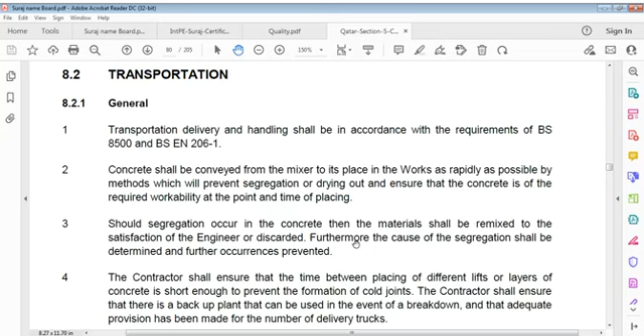Concrete shall be conveyed from mixer to its place of works as rapidly as possible by methods which prevent segregation or drying out, and ensure that concrete is of required workability at the point and time of placing. Should segregation occur, the material shall be remixed to the satisfaction of the engineer or discarded. Furthermore, the cause of segregation shall be determined and further occurrences prevented.

Contractor shall ensure that the time between placing of different lifts or layers of concrete is short enough to prevent formation of cold joints. Contractor shall ensure that there is a backup plant that can be used in the event of breakdown, and that adequate provision has been made for the number of delivery trucks.

Concrete shall be transported to site in an approved type of truck, mixer or agitator truck, which apart from cab and chassis shall be painted white and kept clean at all times. Discharge chute and other dirty areas shall be washed down after delivery to prevent spillage on the road.

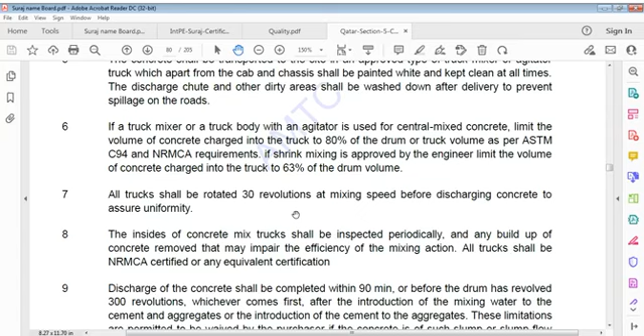A truck shall be rotated 30 revolutions at mixing speed before discharging concrete to assure uniformity.

Insides of concrete mix trucks shall be inspected periodically and any build-up of concrete removed that may impair efficiency of the mixing action. All trucks shall be NRMCA certified or have whatever equivalent certification exists.

Discharge of concrete shall be completed within 90 minutes or before the drum has revolved 300 revolutions, whichever comes first, after introduction of mixing water to cement and aggregate, or introduction of cement to aggregates. These limitations are permitted to be waived by the purchaser if the concrete is of such slump or slump flow that after the 90-minute time or 300 revolutions limit has been reached.

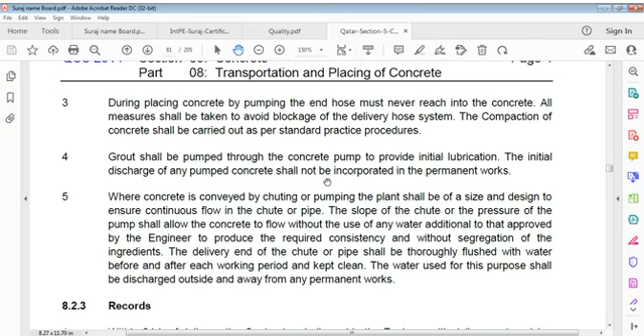The delivery end of the chute or pipe shall be thoroughly flushed with water before and after each working period and kept clean. Water used for this purpose shall be discharged outside and away from the permanent works.

Within 24 hours of delivery, the contractor shall provide the engineer with delivery notes giving the information required under the paragraph as above.

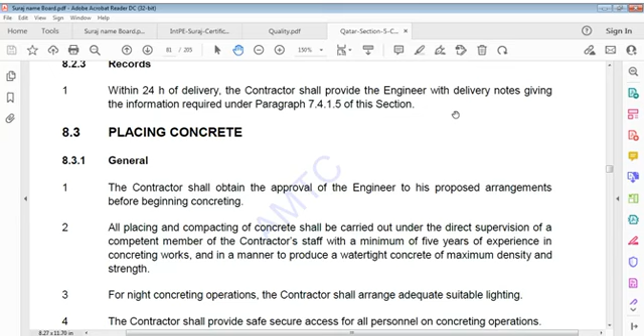Placing concrete. We talked until now about transportation up to the location; now we address the question of placing concrete.

Contractor shall obtain approval of the engineer for its proposed arrangement prior to beginning of concrete pouring.

All placing and compacting concrete shall be carried out under direct supervision of a competent member of contractor staff with a minimum 5 years experience in concreting works, in a manner to produce watertight concrete of maximum density and strength. For night concreting operations, contractor shall arrange adequate suitable lighting. Contractor shall provide safe secure access for all personnel on concreting operations.

Where thickness of concrete section exceeds 600 mm, contractor shall adopt special precautions, to be approved by engineer, to avoid thermal cracking due to external and core temperature differences.

Concrete shall not be placed in adverse weather conditions such as dust storms or heavy rains. No concrete shall be placed until engineer has inspected and approved in writing the surfaces upon which concrete should be placed.

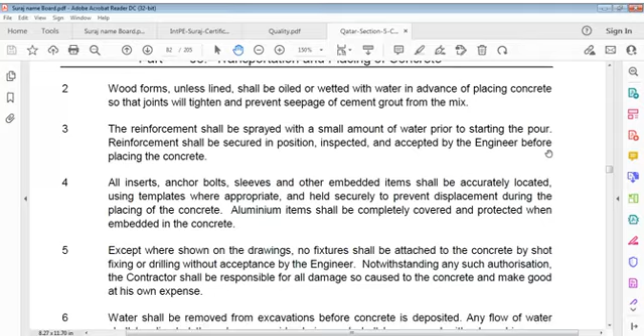All inserts, bolts, anchor bolts, sleeves and other embedded items shall be accurately located using templates where appropriate, and held securely to prevent displacement during placing of concrete. Aluminium items shall be completely covered and protected when embedded in concrete.

Except where shown on drawings, no fixture shall be attached to concrete by shot fixing or drilling without acceptance by engineers. Notwithstanding any such authorization, contractor shall be responsible for all damages so caused to concrete and make good at its own expense.

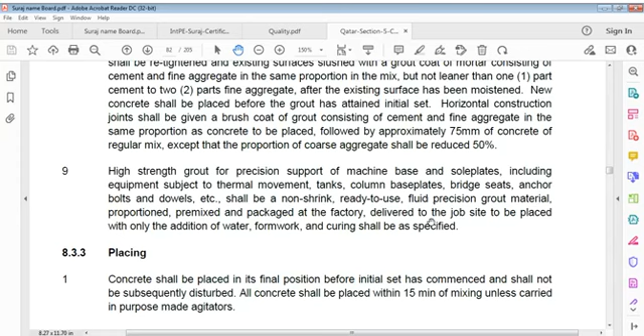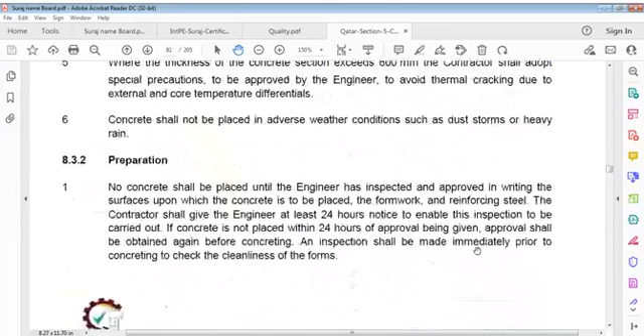We have to, pouring is very impactful and we will take care of this. Page is, I think, 62 or 82. We'll take care, it's because I can't move fast on pouring, it's very important exercise, we have to discuss. It's an important item, compaction we have to discuss then. The continuity of concrete work we have to listen. So it's a good discussion, and we cannot take it for granted just because I can speak and finish it. No, we'll take our time to understand this, how to place concrete, because it's an important item, and that's what it says there. So, well, I think we have gone through certain catalogs, certain books, specifications. It's a good specification as far as it's concerned. That's why I'm saying what we have to understand to get, and it's preparation etc. All this, I'll take care of this next time. We'll see you, I hope you enjoy this well in advance.

I think concrete specification it is, and I know concrete is very important material for everyone, as well engineer, structural engineer, whosoever, even those who deal with structural steel, they have to do foundations. So it's for all, concrete must be taken care of in a professional way. That's the reason I try to gather information from various specifications so that we should know what it says. And because I worked also in Qatar and UAE, I have some exposure of that, which I want to share with people. I think it's the best way to do that.